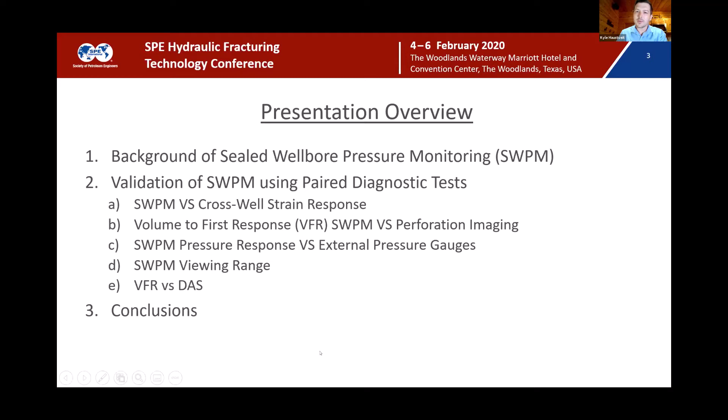You'll see SWPM throughout the presentation, that's the acronym for sealed wellbore pressure monitoring. A bunch of engineers came up with it, so the name's not very unique, it really is what the name says. We have a sealed wellbore, and we're using it to monitor pressure as we frack an offset well. The easiest analog I like to use is imagine putting a pressure gauge on top of a water bottle full of water and squeezing that bottle. As you compress that system of nearly incompressible fluid, even a small reduction in volume is going to produce a large pressure response. Because of that, using a new wellbore, we can simply place a surface gauge on a wellhead, which is very low cost and virtually no operational risk.

The responses we're monitoring result from a hydraulic fracture intersecting the wellbore and applying that compression to the system. The cornerstone diagnostic we used to cross-validate was strain monitoring with permanent downhole fiber. We've also used downhole cameras and microseismic to validate. An important note is sealed wellbore is almost always used without fiber optics, that's what makes it cost-effective and scalable. We've used surface gauges for more than 90% of the stages we've monitored. We have monitored with downhole gauges too, and there are some quality benefits to downhole gauges. About a month ago, we finally received notice that the patent has been granted.

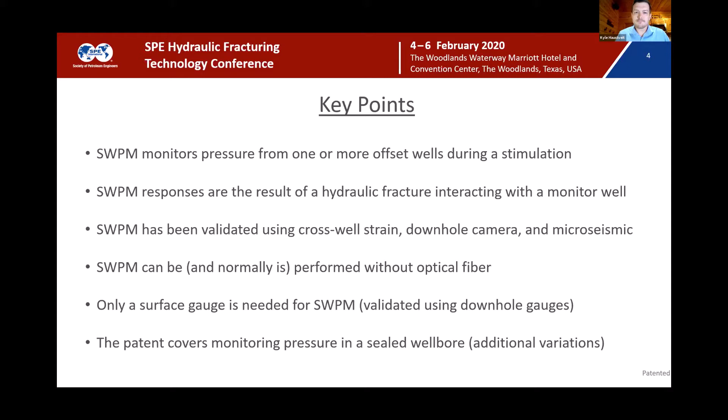Okay, so a little background story of discovery. We were not searching for sealed wellbore pressure monitoring. The discovery came as part of a large integrated diagnostic project where we had a treatment well.

On the bottom, you can see the treatment well in green with fractures extending away from it, and we had an offset monitor well. That monitor well was a new drill, not yet completed, with permanent fiber strapped to the outside of the casing, cemented in place, and permanent bottom hole pressure gauges. The pressure gauges are dual sensing, meaning one gauge is ported to measure pressure inside the casing, and one gauge is ported to measure reservoir pressure.

Our goal was to use the pressure gauge ported externally to compare and contrast the pressure responses we see to the fiber optic responses. We never intended to use the pressure gauges ported inside the casing for anything to do with offset pressure, because the wellbore was fully sealed, so we didn't think it was going to see anything. We were planning to use the internally ported gauges for some of the friction reducer testing on the frac, to measure pressure differential across the plug, and then to perform production and pressure interference testing post completion.

But after monitoring this pressure, these gauges were permanent, so we were recording the data throughout the entire completion. There were 20 wells in this package, so I'm just showing 2 of them. The first person to recognize that the internal pressure gauges on a fully sealed wellbore were generating responses was Wolfgang D., an engineer at Devon at the time.

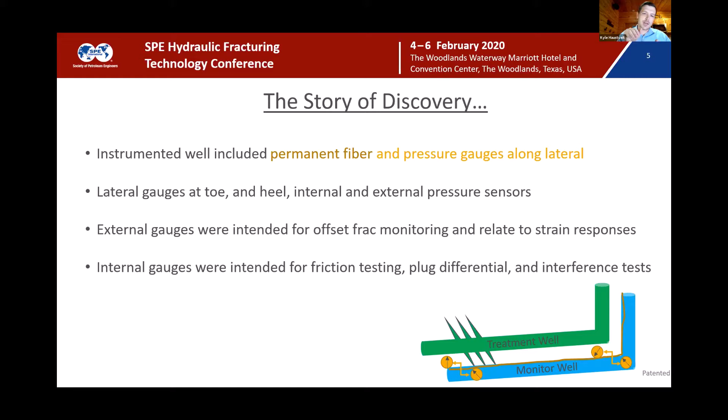Before we dive into the image comparing pressure and strain, I want to get a little background on strain rate. Strain rate is measured on a fiber optic cable. This can be a permanent install like we had, or it can be a dip-in cable. With fiber optic monitoring, you're interrogating the fiber, meaning you're shooting a light pulse down the glass cable. It's a very similar makeup to what we use in telecommunications. The speed in which the light pulse comes back to the surface is the speed of light divided by 2, so that's why we're able to get tens of thousands of measurements per second.

The entire cable is the sensor. That's what's unique about fiber optics - the entire cable from surface to downhole is the sensor. As we interrogate it and things change in the cable, the way the light backscatters also changes. Looking at the bottom, we've got a no strain rate change on the far left, meaning our fiber optic cable, the glass cable, is staying consistent in diameter.

The middle image is a fracture opening. Imagine a fracture growing from an offset well and intersecting a monitor well in the far field. As that fracture intersects that cable, it's creating an aperture, an opening. I think of it as a rubber band that we stretch. So when you stretch that fiber optic cable, it narrows the diameter and you get a very different backscatter signature.

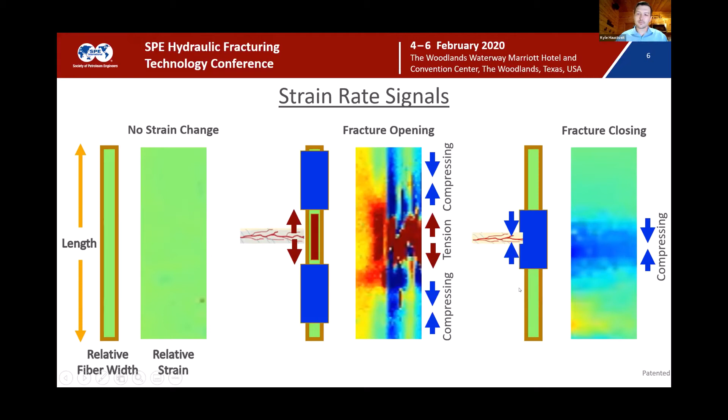So now we'll look at 2 stages of the completion, monitoring strain and sealed wellbore from the offset. This was the aha moment.

This was the setup. On the left side of the image on top, we have depth increasing from top to bottom and time increasing from left to right. We're looking at 2 stages, so we can see a shift in depth. That's because we completed one stage, we moved back up hole and completed the next stage. So we're shallowing in measured depth as we complete each stage.

Let's walk through what the colors mean. Red is tension, fracture arrives, and we can see multiple arrivals throughout these 2 stages being completed. The triangles on the left represent where clusters have been shot in each stage. They're colored by stage, so the white triangles are the stage 1 clusters.

On bottom, we have our treatment pressure data, pressure and rate on the top. We had changes in our rate during the pump schedule. Here's a wireline pump down and then the second stage.

Below that, we have our offset sealed wellbore pressure monitoring, and this pressure is being measured from the same well that the fiber optic is strapped to. Below that, we have the derivative, first derivative of the sealed wellbore pressure, and we use that to amplify these inflections. And then we can use an auto picker, use some pretty simple logic to look for peaks and troughs.

Here we can see this is the first correlation we look for. As soon as that fracture arrives, we see the blue, red, blue on the strain. We also see our first pressure inflection on the sealed wellbore.

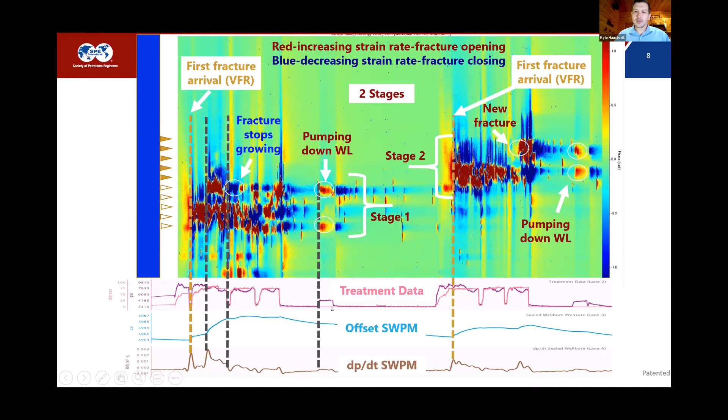Jumping to the next stage, very similar story. First fracture arrival on strain shows a clear indication on the sealed wellbore. Second arrival later in the stage, we see a second inflection. And again, the wireline pump down shows up both on strain and on the sealed wellbore.

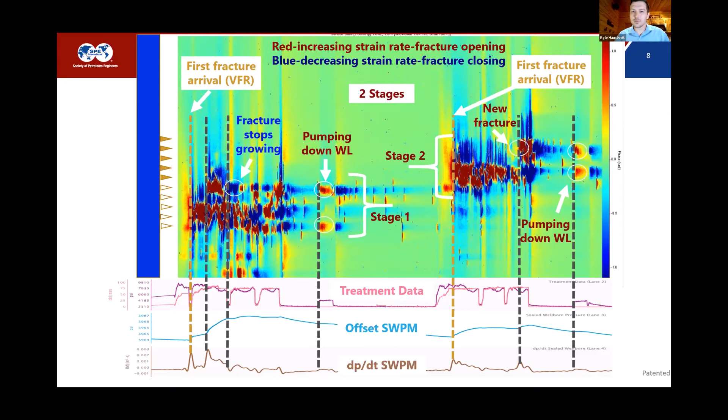So this was the aha. We were excited. We believed what the pressure was telling us, and we knew that this was a pathway to a lower cost, more scalable solution to monitor far field fracture growth.

Very simply, we look for uniform distribution. Our goal is to create fractures that are the same size, so we have the same SRV shape, and we can effectively drain the resource in place.

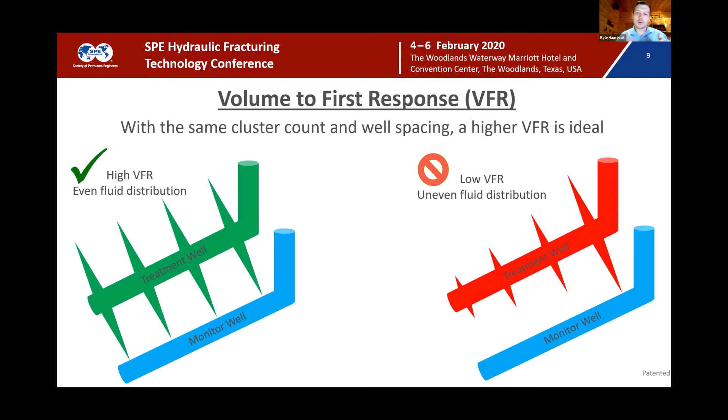So the metric we use is called volume to first response. It's simply the slurry volume we pump into a treatment well when we record the first pressure response on the offset. If we're distributing that fluid evenly across the stage, it's going to take more volume for each fracture to arrive at the offset well. If we're distributing that fluid in a way that's non-uniform, we'll have a runaway fracture that grows more rapidly than the other ones, and we'll see a very low volume pumped before the first response arrives.

Perforation imaging is a tool we like to use to measure the amount of erosion at each perforation, and we do that to understand how much sand exited that perforation.

Again, our goal is to create uniformity, and one of the ways we do that is by trying to keep our perforation hole size similar across every cluster. Perf friction is a function of diameter to the 4th power, so maintaining an equal hole size is very critical.

Perforation friction is helping to improve our fluid distribution, and the camera results agree very well with the sealed wellbore data. So again, cross-validating diagnostics is a very important step.

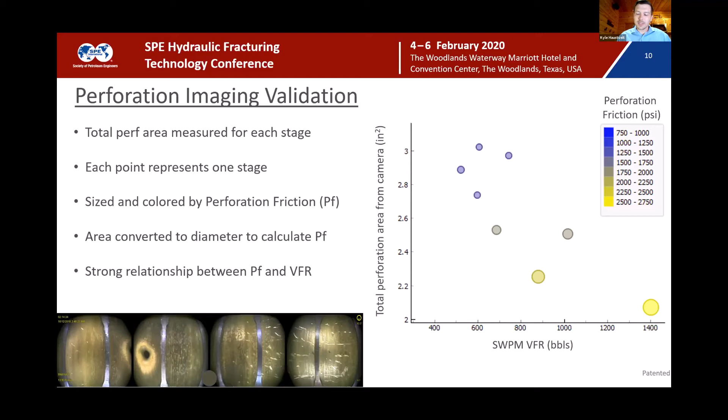Gauge comparison. There's a lot of offset pressure techniques that are commercially available. They've been improving rapidly over the last several years. So I wanted to compare two of the main types.

Sealed wellbore is the first one, and then we'll look at an offset pressure below that. So with sealed wellbore, a single treatment or single stage being treated, treating pressure on the top. Below that, we have the smooth red curve, a sealed wellbore pressure on the offset with strain behind it. We see very nice alignment when that fracture arrives, pressure and flex.

I mentioned we also had external gauges on the same well. So same stage, same location. Let's see what the external gauge looks like.

In this case, we had pre-existing fractures behind us, below us. And as we started to propagate and grow a new fracture from a new stage, it starts to compress the pre-existing fracture. So the result is if we're only using an external gauge, we see that pressure inflection much earlier, and it's not an indicator of a new fracture arrival. It's an indicator of stress shadowing or squeezing of our pre-existing fractures.

So this is a really important comparison. We can't use the external gauge in the same way that we can internal.

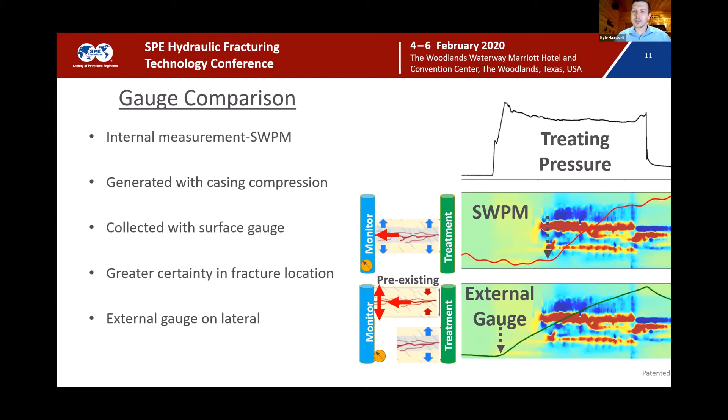Quickly, the next one is how much data can you get from a single well with the three main buckets of offset pressure monitoring? The three buckets are sealed wellbore pressure monitoring, an external gauge like we looked at, or a newly completed stage in a child or infill well. And then the third bucket is a parent well or a primary depleted well.

With sealed wellbore, the first thing I'd ask you to look at is the y-axis. On the second lane, our range is 1 psi. These are small magnitudes, but they're consistent. It's not a function of where the fractures intersect in the wellbore. It's whether or not it's squeezing that system.

So very consistent arrivals. The next one is that external gauge, which behaves the same way as a newly completed stage. Now this y-axis varies by about 1700 psi. This is heavily influenced by how far away the fractures are from one another that you're monitoring from and creating.

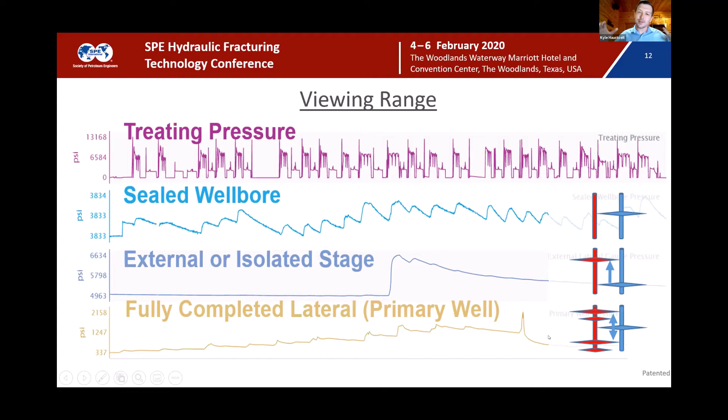And then a fully completed lateral or primary well is much more variable, because we don't really have any control as to where that fracture could be intersecting the monitor wellbore. And we risk screening out or plugging up that primary well, which happens here. There's a 1500 psi increase in the monitor pressure, and then we see it fall off. That's because we bridged that lateral with sand during the interaction.

We were fortunate to work with another operator, so we've commercialized this technique. It's patented, and because of our partnership with Well Data Labs, they're able to sell it to other companies. We price it in a way that Devon can receive additional data to learn faster. We also give the operator the choice to pay a little more and keep it tight hole.

This operator wanted to work closely with us, so they completed a fiber well, permanent fiber on one well, and monitored an offset well, also with permanent fiber.

One of the main questions we got early on was, does volume to first response really correlate to the near wellbore distribution? So this is the best case study we had. We're fracturing a fiber well, monitoring a fiber well that also had a downhole pressure gauge and a sealed wellbore pressure monitor on it.

The green line is the sealed wellbore, what we call uniformity index, simply the volume to first response divided by the cluster count. The idea being, if you add more clusters and you're truly treating those new clusters, this line should be completely horizontal. But if you add more clusters and you're unable to treat the additional clusters, you'll start to see that degrade over time.

The blue line on the primary y-axis is the DAS, or distributed acoustic sensing, the measurement from the permanent fiber that we're stimulating, the DAS uniformity index, and we see the same signature.

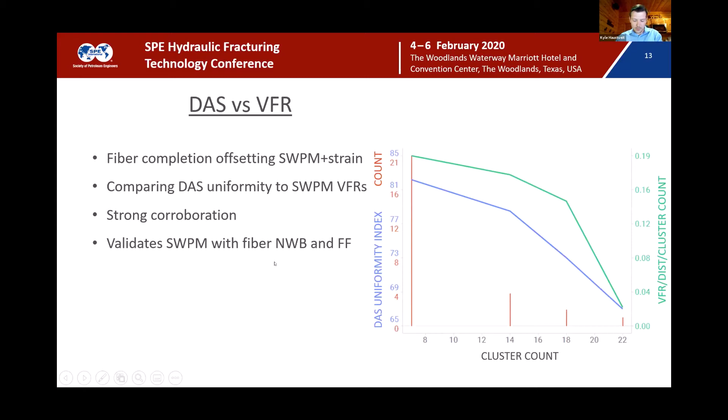So strong corroboration between the two. Again, sealed wellbore, a fraction of the cost, aligned very well with what we were seeing on both near wellbore and far field fiber.

Some problem statements, this is working with an integrated group again. Completion designs are almost always unchanged across the laterals. I'm pretty confident in saying at least 90% of the stages completed in the US are consistent, geometric cluster spacing, same pump schedule across 2+ mile laterals, but we know rock properties change.

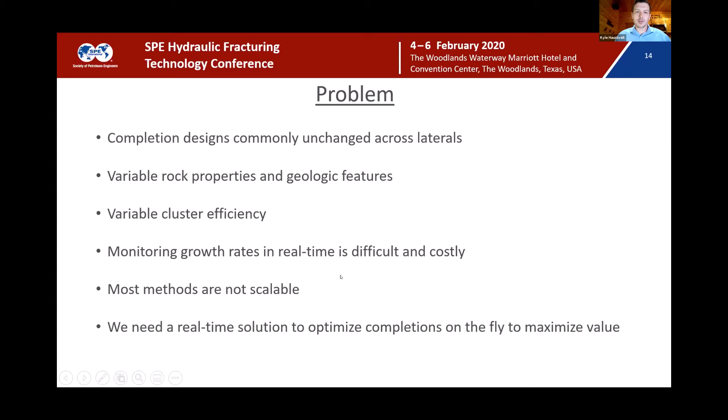We know we have faults and features. We know we have variable cluster efficiency for a lot of reasons: plug slip, poor cement isolation, runaway perfs, and to date, monitoring far field pressures and growth rates have been expensive and very difficult to do in real time. So for us, the problem was pretty clear, and we knew we needed a real-time solution to optimize completions on the fly.

So some of the other diagnostics that have tried to do this: we have offset pressure monitoring from a fractured stage, which we've used and gained a lot of value from. The biggest con for us is it's been tough to scale. As we move into execution mode and optimization mode, we don't want any hiccups in the execution of these jobs. We've been putting 20+ hour pump days away, and trying to alter the zipper order and staggering our completion can hurt those efficiencies pretty quickly.

Cross-well strain, we've looked at a couple of examples. It's one of my favorite techniques, very accurate. It tells you when and where, how many fractures arrive at an offset. The con is it's costly, and it gives you a single point measurement at one wellbore.

Microseismic, the pro, very large coverage area, helps you understand what's going on between wellbores, how you're interacting with faults. The con is the cost can get high depending on the duration of monitoring, and the accuracy can be challenged in certain formations. Sealed wellbore, again, it's low cost, it's scalable, we know it's accurate, it aligns with strain. The biggest con is you have to have a sealed wellbore, so you need to delay prepping an offset well.

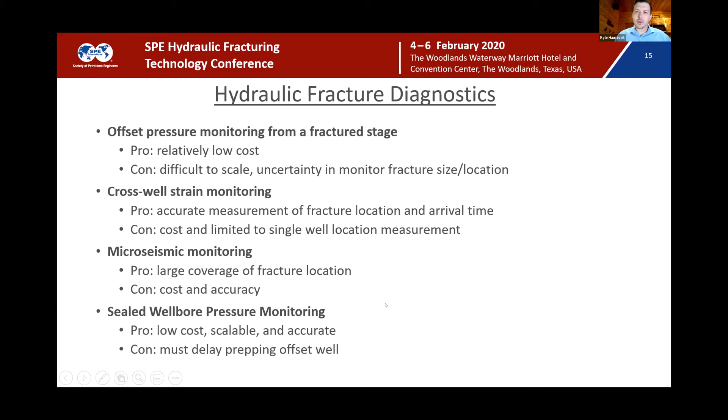Some of the use cases, cluster efficiency. So we rank by volume to first response. We'll add clusters, add perf friction, vary rates or fluids, and we're trying to improve how we place that fluid. And we've used this in real time.

Last summer, we executed a handful of stages in Wyoming in the Turner Formation, and we made changes on the fly based on these responses. That resulted in about 10% completions cost savings on that well. We applied that new pump schedule to the next well and saved about $250,000 without sacrificing performance.

Depending on how our wellbores are spaced relative to one another, we can determine the hydraulic half length, insight into height. If we have a pinpoint completion, whether that's a single cluster in a plug and perf or a sleeve design, we can use that volume balance equation to estimate our fracture or hydraulic height.

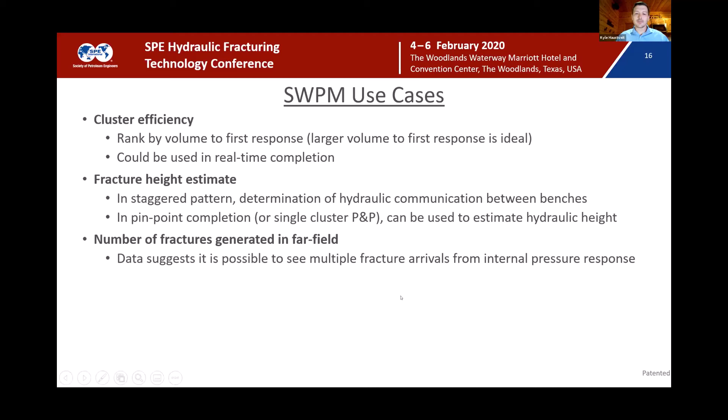We can see how many fractures are generated in the far field, so we can actually see multiple inflections like we looked at in that first case study.

We've used it quite a few times to understand the impacts of depletion. So if you're drilling and completing a well next to depletion, is that depletion pulling your completion back towards the lower pressure sink? If so, how do you overcome that? Is it a recharge? Is it a refrac?

And last, definitely not least, is fracture model or just subsurface model calibration. We use that to improve our certainty in our simulations. For a long time, frac models are calibrated using logs and DFITs, which is great. You get a pressure match, things look good. This is just giving you one more step, one more level of confidence by saying, I know my pressure match is right, but I also know my hydraulic geometry is right at some distance, at some volume during that schedule.

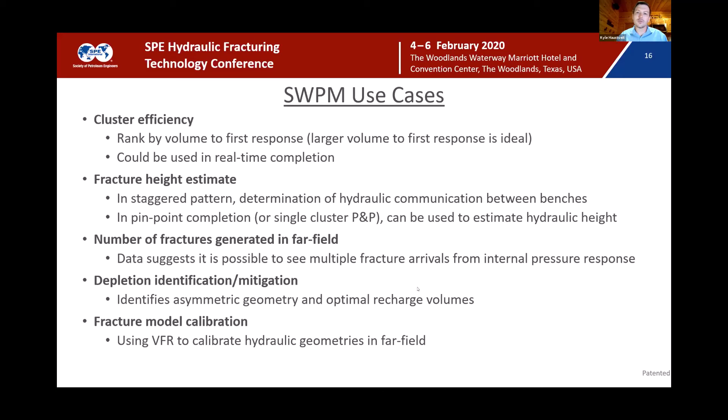Going back to what Deb said, networking is key for a lot of things. When we decided to share this technique externally, because of the networking and involvement with SPE, I was able to reach out to key people before we published it and spend some very important time with small groups, one-on-one, and talk through this technique, understand the need in the industry, and get some valuable feedback that helped this, I believe, be a lot more successful than it would have been if we hadn't been working with others. The other benefit to us is we get to learn a lot faster from a lot of smart people. Realizing there's other resources out there is very important. You learn a lot faster together than you will in a silo inside one company.

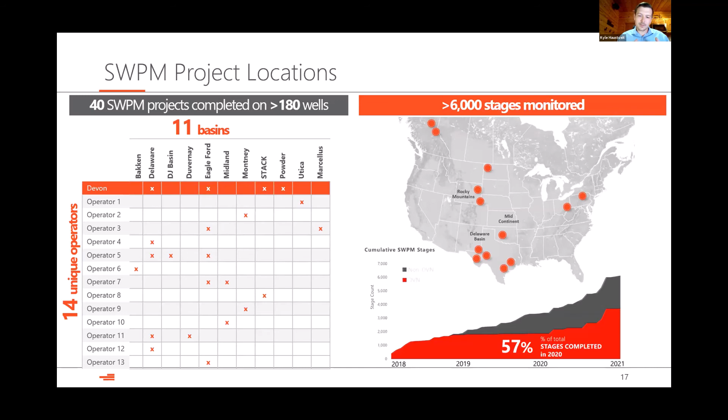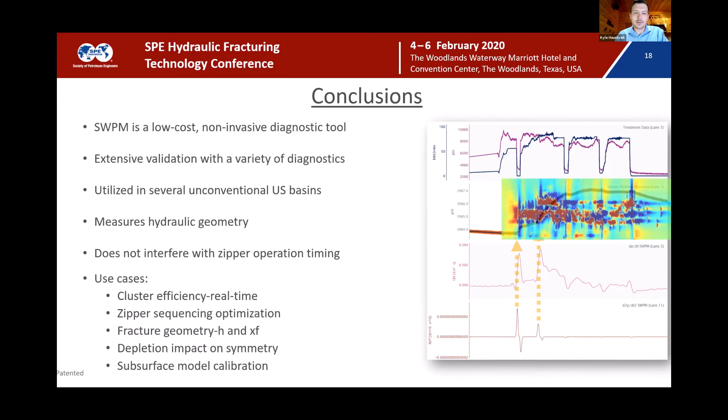So quickly, in closing, it's a low-cost diagnostic tool. It's a really interesting process to go through the discovery to the IP process to the commercialization process, and ensuring that you're realizing value, you're protecting value every step of the way. Extensive validation, a lot of diagnostics and case studies across almost every US basin. It's a measurement of hydraulic geometry. It doesn't need to interfere with zipper operations, and you can see the case studies below there.

So with that, again, acknowledgements, lots of folks have been involved. And I'll stop there and open it up for any questions.

That was a real interesting presentation. Thanks, Kyle. Are there any questions for Kyle real quick? Got a few minutes.

So I got a couple quick comments on here. One, I really appreciated that you weren't initially looking for this. You're developing some tests to look at some other stuff, but because you're looking at everything and paying attention to things, you saw this response and were able to use it. I think that was a neat way to kind of develop the technology there. The other thing, I like that you mentioned the networking and how that helped you develop your technology. That really kind of tied in with what Deb had to say as well. It was a good job, and I appreciate it.

Any other questions for Kyle? Hey, Kyle, this is Greg Hilton. Can you hear me? Yes, sir.

I was curious what you saw on that well related to volume to first response that made you make the adjustment. Did you actually not see a VFR, and that's why you either lengthened your stage or reduced clusters? What was it?

Yeah, good question. And really, this first trial was to see, can we do it? There's some delay in data transfer from field to the office. So number one goal was, can we see a response in time to make a change that has a cost impact? And can we communicate that back to our consultants in the field to make that change? So that was really the focus. Luckily, in that Turner formation at that well spacing, we had quite a bit of data. So we had a statistical understanding of what the range should be for volume to first response. So we took our P50.